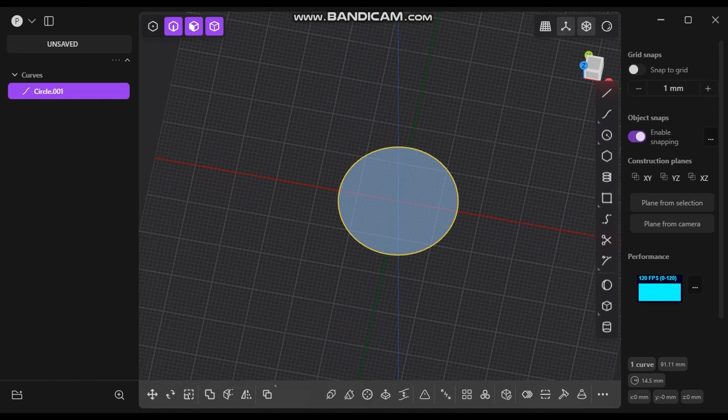We start by deleting the default cube and then zooming in on the grid. You can delete the default cube by pressing delete. On the right, we choose the circle tool and then make sure center circle is selected. We use the origin as a reference point, then use tab to enter our dimensions. In this particular instance, we will be choosing 29 millimeters as the base that will be attached to the wall. This will accommodate the screw.

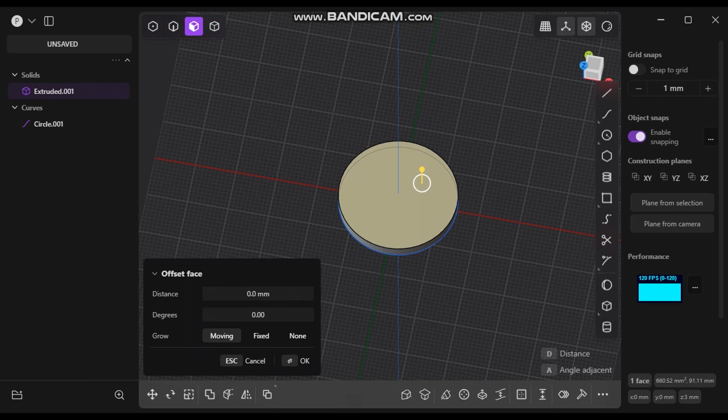Next, we select the curve, which auto selects the extrude function, and then extrude out to 3 millimeters. Press enter to confirm or press the OK button. Clicking on a surface or a face, you can use that as a drawing surface for one of the tools. We chose the center circle again and 22 millimeters. This will be the midpoint.

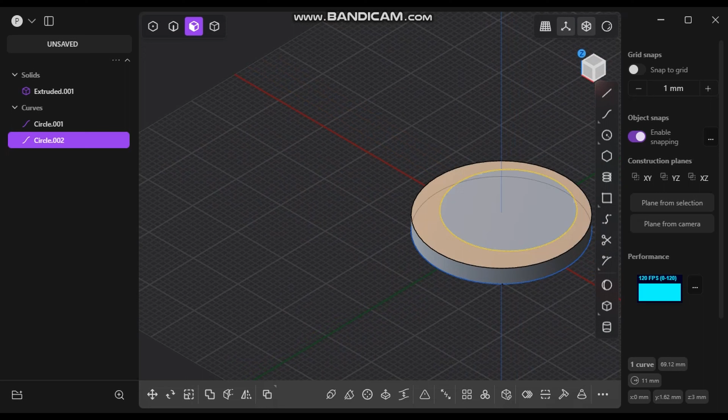Before we extrude, we move the circle to make an offset so it will fit the screw. I did this first by moving it down on the y-axis to where it touches the bigger circle, and then I made another move up by the particular amount that I want. In this case, it'll be 4 millimeters. Moving the circle over, it's ready for extrusion. This middle section will be 40 millimeters.

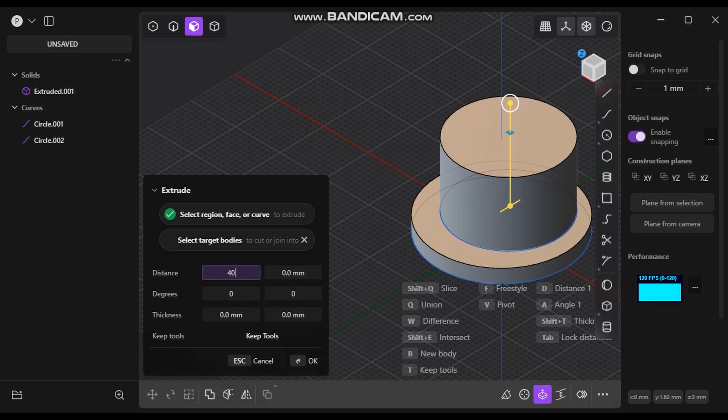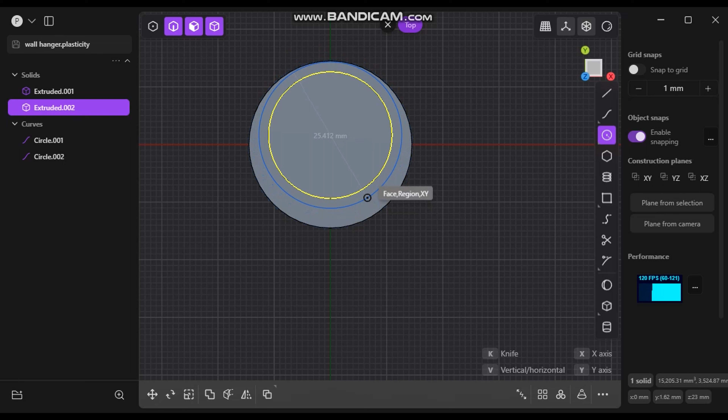The third feature on this will be the lip. Again, another circle. Then another extrude. Again, tab to enter precise measurements and enter again to confirm.

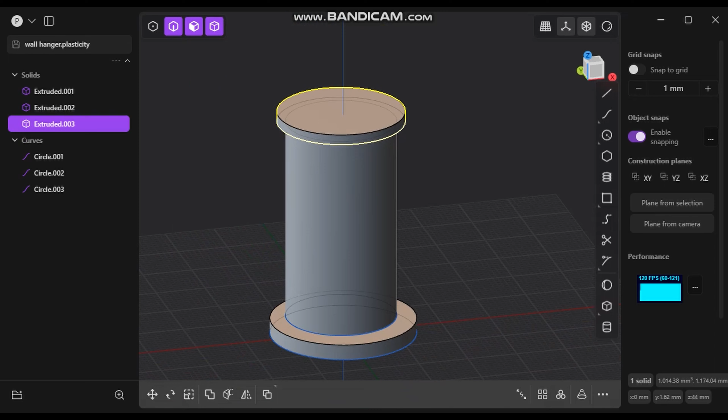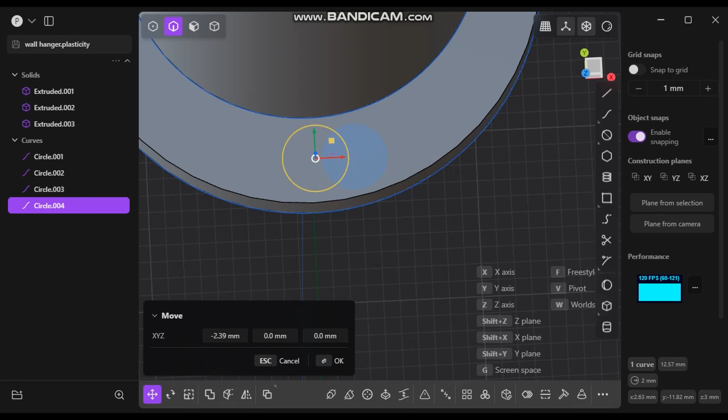Okay, moving on to the screw hole and the inset where the screw head will sit. Starting with the inset for the screw head, we are making sure that 2 millimeter inset will sit inside the two edges. Pressing G on the keyboard, we move the circle into place. First, you select the main body and then the tool body that you will be performing the boolean operation on. In this situation, we use the difference. You can also use the search menu by pressing F on your keyboard.

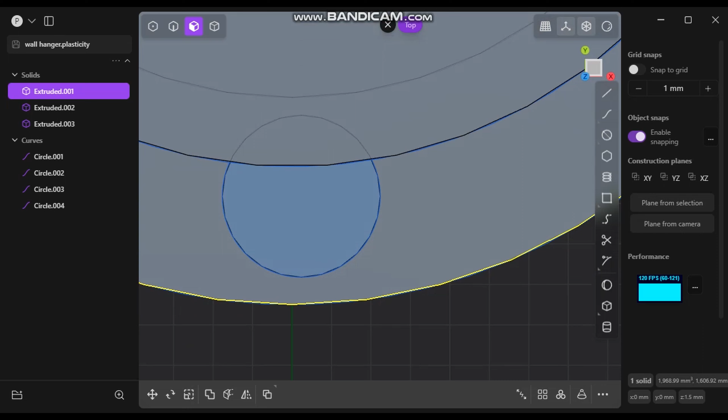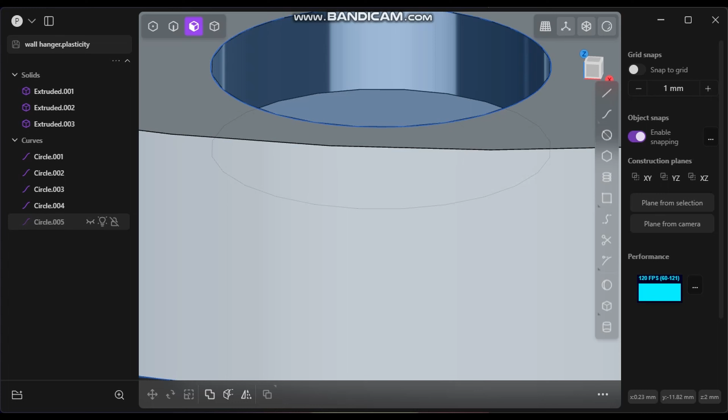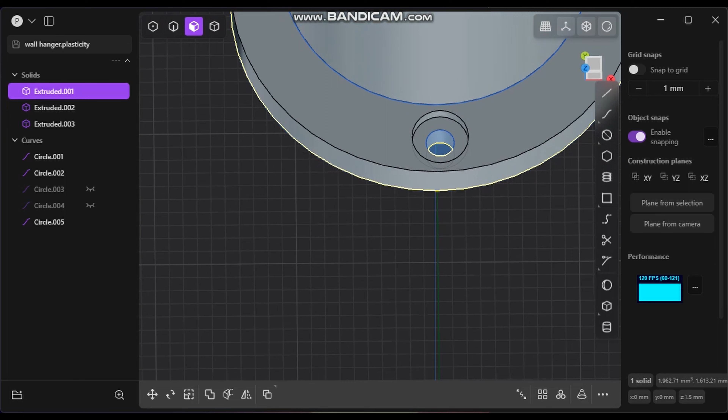For the screw hole, we use a center circle. We will need to hide the curve above in order to... I activate the difference boolean at the same time as the extrude function, making sure the extrude goes at least past the body that it's cutting into.

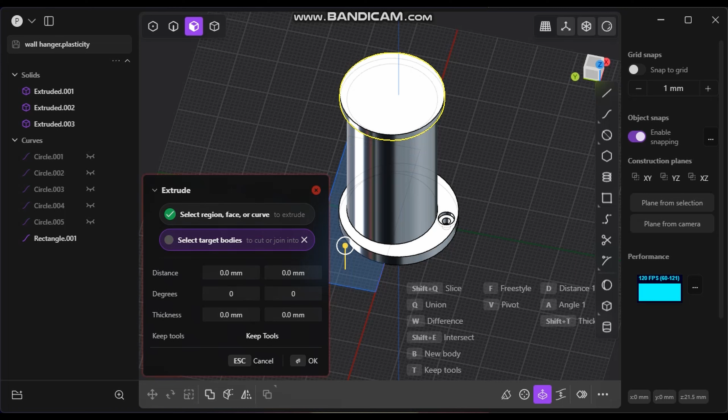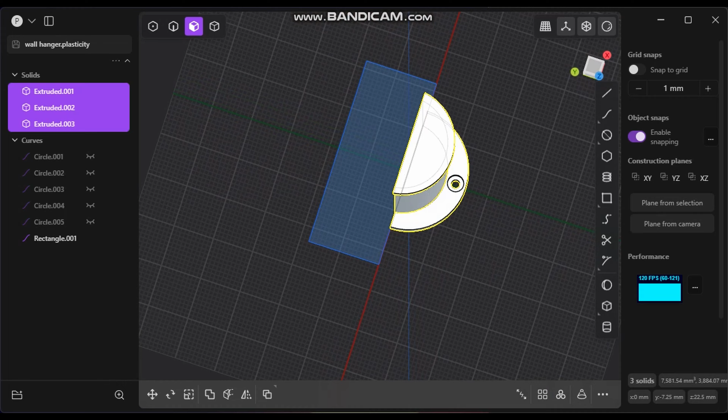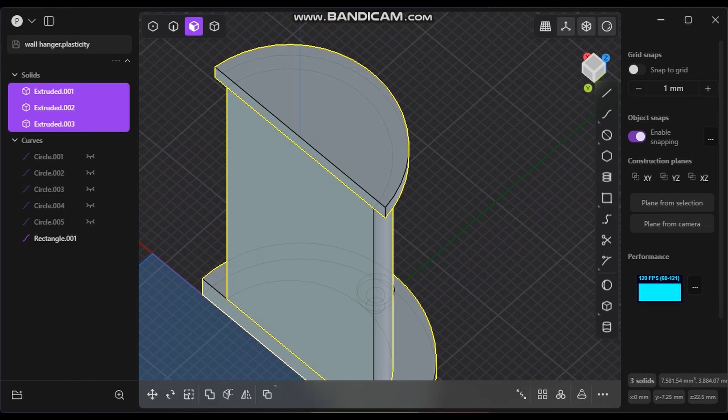To save some plastic when 3D printing, this shape only needs to be about half of it. So we use a rectangle and an extrude function to difference away half of the body. After we're happy with the body, we go around and add fillets.

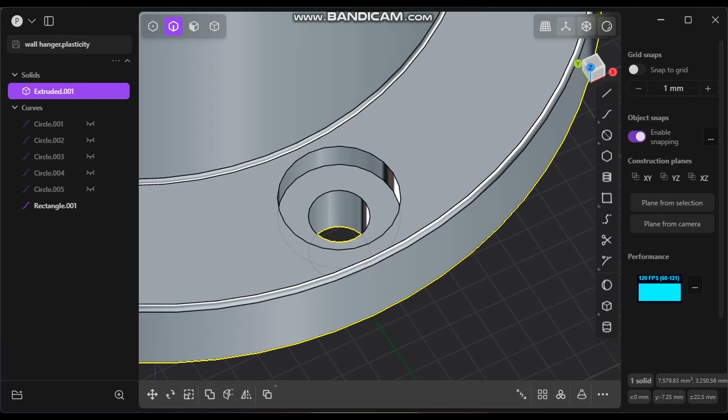After a quick 3D print and a test fit, the base and the screw hole were too small and didn't fit. A good tip is to keep your parts in separate pieces for as long as possible. What I did here, I created a group and made copies before I did a union boolean.

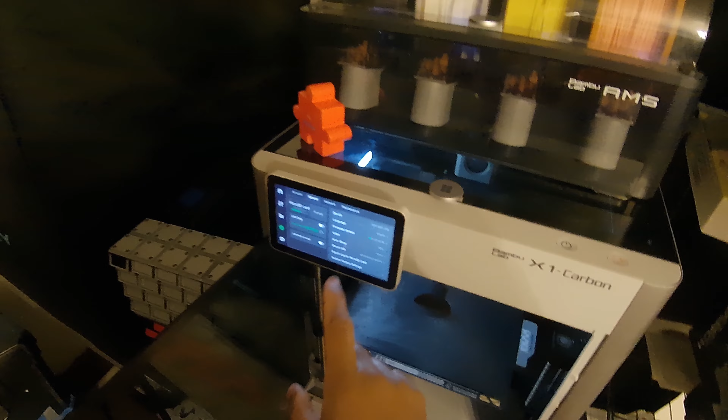After changing the size of the base plate, I then used another rectangle and a difference boolean to make sure that the bottom piece was flat. After these minor changes, it was great to see that the piece fit very well.